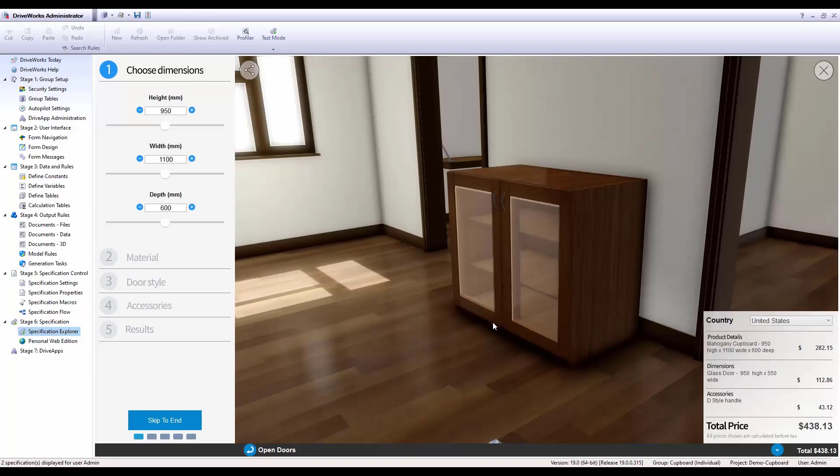So you'll see that we've got this interface where we can go in and specify the height, the width, the depth, kind of rotate our model around and get a nice perspective on what we're creating. And then we can proceed through a number of design choices such as material, the style of door that we're going to have, and then things like accessories, knobs, pull handles.

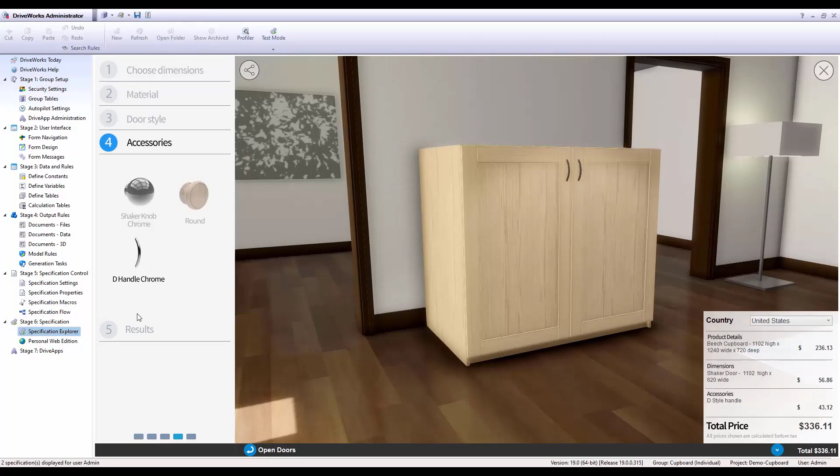And at the end, what we wind up with is essentially a deliverable for all of the information and documentation that we need. So I've got the ability here to have DriveWorks go in and quote this cabinet.

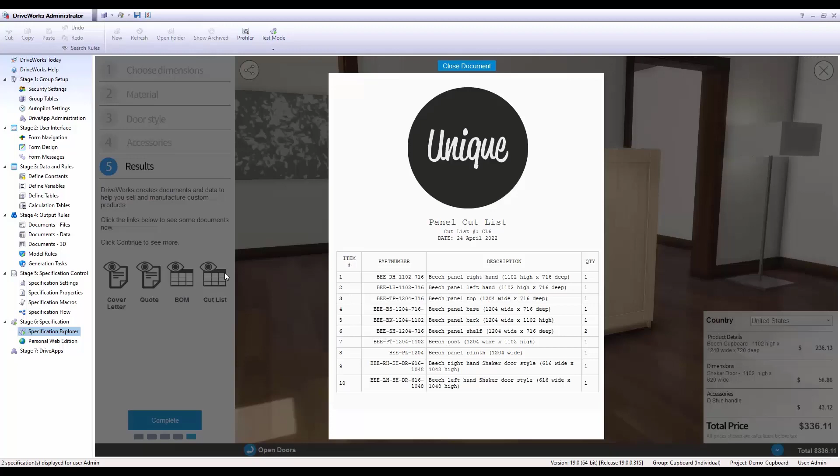It can take into account all of those parameters that I specified and then give me accurate pricing on the fly. It can also generate a bill of material that I can send out on the floor so we know what components we need to round up, as well as a cut list for all of the items that we're going to have to custom cut and manufacture.

Of course, the big thing that this would also deliver is all of the SolidWorks models. So if we had a little bit more time, I would basically hit generate and we could watch this thing kick out the 20 or so models that are required to actually build this cabinet.

But in a nutshell, that's what design automation is. It's the ability to take all of these processes that really aren't terribly difficult for our engineering team or our designers, right? The ability to go in and modify these models to create a custom configuration. But we're greatly reducing the amount of time that takes.

We can take a process that was hours or even days down to minutes. In this case, it didn't take us long at all to go and configure this cabinet, and we could generate all of those documents and models in just a number of minutes.

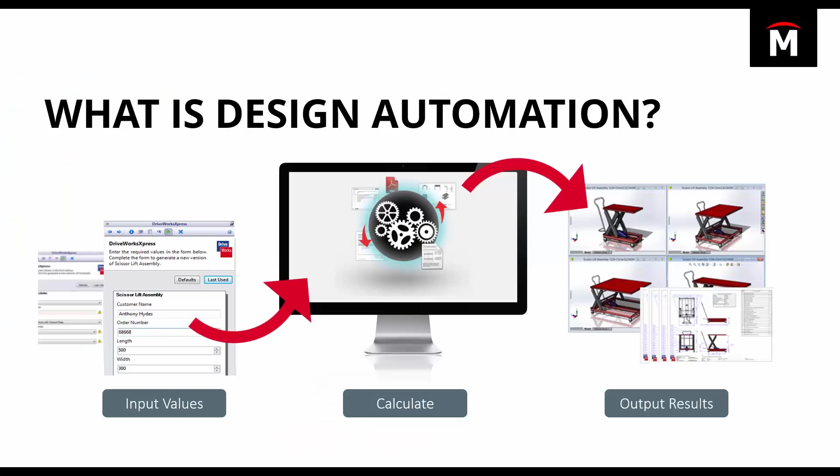So design automation can solve a lot of today's challenges, and the big question that often comes to mind is, if automation is so great, why wouldn't you automate? And the answer really isn't always that simple.

First and foremost, automation can be intimidating. Traditionally, we've talked about programming, having to know a programming language and develop your own applications in order to automate SolidWorks and some of your other processes.

There's always kind of the fear of change. Companies are afraid to part with the way it's always been done.

Sometimes companies are just unaware of what automation capabilities exist, right? You kind of get the blinders on, you're very focused on the task at hand, and you fail to just kind of stop and look around and see what possible solutions exist.

And then finally, automation can be intimidating. And if you don't believe me, jump in a self-driving car, and the first time you take your hands off the wheel and let the car automate that whole driving process, it can be a little bit scary, right? So there's a number of things that can be a little bit intimidating or that companies often face, and it's not uncommon.

So we've got a slightly different approach with DriveWorks that makes this a little bit different. So when we're approaching automation in the traditional sense, we're often thinking about programming and API. We're thinking about things like C# and Visual Basic and having to write and know all of these programming languages, which has a very steep learning curve. Okay? It also requires a lot of ongoing maintenance.

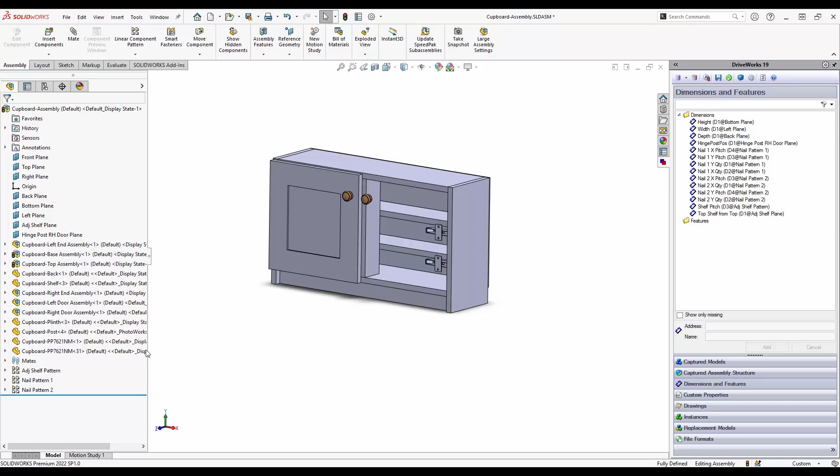As the height of this cupboard gets a little bit taller, we might need to add additional shelves. And so that's basically something that DriveWorks needs to be able to automate through rules. In order to make this happen, all I've got to do is go find whatever functionality in SOLIDWORKS controls the number of shelves and capture it. So I've actually got a pattern down here for the shelf.

And if I double click on that, you'll see right out in the graphics interface, it actually shows the spacing and instance count for that pattern. And if I click on the instance count, over on the right-hand side in DriveWorks, it allows me to just capture this value and give it a name. So I might go in here and just give it something simple like shelf quantity and hit add. And you'll just see that it adds that shelf quantity value to this list of already captured dimensions.

So you'll see that I've got some in here for height, right? We just selected the height dimension. We selected the width dimension, the depth dimension. And so I'm not really having to worry about any of the API or some of the very technical information that would kind of allow me to access this information in the background.

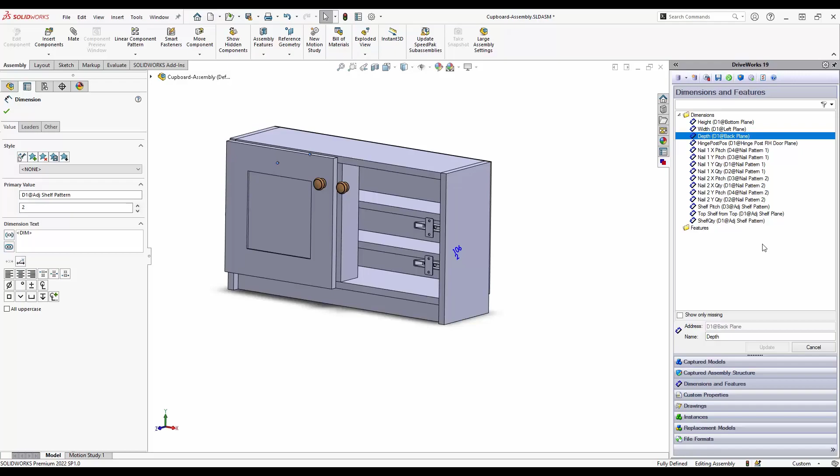I'm literally interacting with the SOLIDWORKS models that I'm familiar with, finding the parameters that we know we need to be able to change. I click on them, I give them a simple name, and I hit add, and that's essentially it. Okay, so in SOLIDWORKS, it's very easy to go in and pick out the different pieces that you want to automate. Now back on the DriveWorks side of things, what we're going to do is take those captured values and write rules that allow us to change those values.

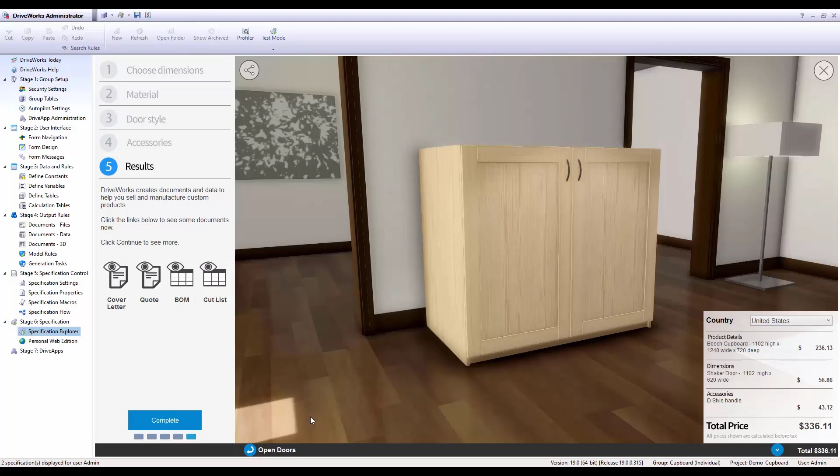So maybe the current height of the cupboard in my actual SOLIDWORKS model was something like 400 millimeters. I'm going to figure out a way to write a rule that allows me to vary that value with DriveWorks. Now, in order to do this, I really need some sort of input. And we saw that I had some sliders I could kind of work around with, and you'll actually see that on the back end of this DriveWorks project here.

It's very easy to create a graphical interface because you simply just grab these different form controls that you see up here on the toolbar and you place them onto your graphics area. So I just selected a couple sliders, placed them out here, and then I gave them names like slider height, slider width, slider depth. And this allows me to essentially input these custom values.

Once I have captured the items in my SOLIDWORKS model that I want to be able to control, and then I've given myself a way to vary those values, essentially inputs to specify new values, I've got to find a way to connect the two. How do I take the value from height and drive it into the dimension for height in my model? Well, that all comes down to the rules engine in DriveWorks.

So right here, inside of DriveWorks, I'm going to go to Model Rules, and you'll see a list of all the different models that I've captured in DriveWorks. If I click on one of these models, I get a list of all the different captured items associated with that. So right now I've got the top level assembly selected, and these are all the dimensions and custom properties or features that I've chosen to try and automate.

And what I'm going to do is I'm going to go double click on the height dimension. And this is going to bring up a rule that we're going to go ahead and fill out here. So if I want to go in and take the value from that slider and transfer it over to the dimension in my model, it's actually very, very simple. I don't have to worry about any of the crazy things associated with, let's say, a C# program. Things like namespace, methods, libraries, you name it.

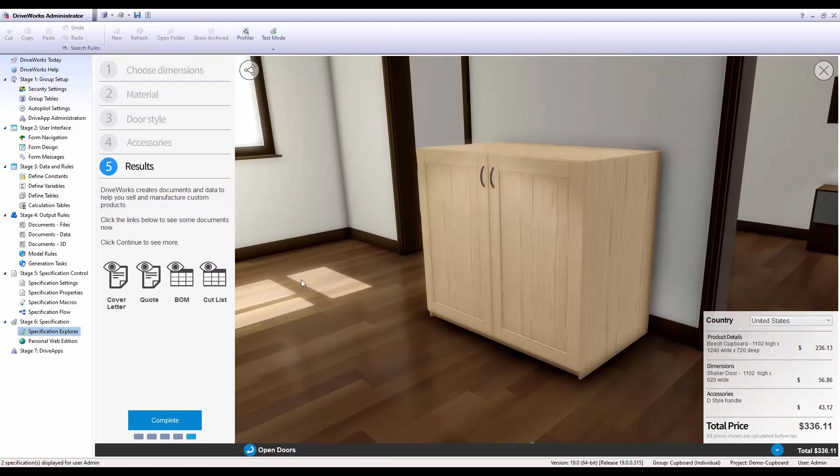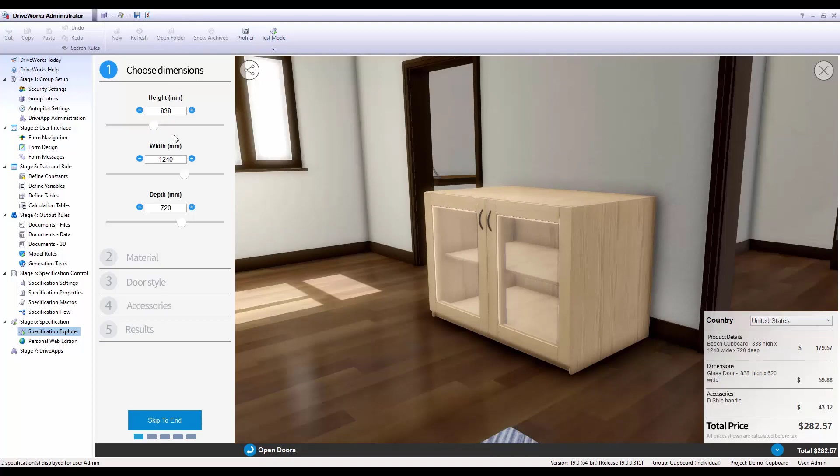that example that we were running earlier, and if I change this door style to glass, what we'll be able to see is that as I vary these height dimensions, notice that when it gets a little bit shorter, we go from 3 shelves down to 2. And it seems to happen as we cross that 900 millimeter threshold. Anything over 900, we get essentially 3 shelves, or kind of a bottom floor and then 2 shelves above it. And then we reduce our shelf count by 1 as we get below that 900 millimeter threshold. So how would we write a rule to accomplish that?

Well, inside of model rules, I'm going to go find that shelf quantity dimension that I selected earlier, and I'm going to write a rule to determine whether or not we need to have 1 shelf or 2 shelves. The way that you would do this is with an if statement. Now, you may have used if statements in other applications, even something like Microsoft Excel. But if you're not familiar with an if statement, DriveWorks actually makes it really easy to write out the correct syntax. If I go to this functions dropdown, you'll see that there is an if function that I can select. And this particular function actually has a handy little wizard that will help me create the proper syntax.

And what it's asking for first is the condition that I want to evaluate, right? What is the determining factor when we're trying to decide if we need 1 shelf or 2 shelves? Well, really, that's going to be the height of our cupboard. So I'm going to go and select that height slider again. And essentially I'm going to say that if we're over 900 millimeters, we need 2 shelves. And if we're under, we need 1 shelf. So I'm trying to decide if my slider for height is greater than 900, right?

Once I've determined what that condition is, now I've got to determine the outcome. What happens if it's over 900? What happens if it's under 900? So for my true condition, what I'm going to say is if it's over 900, give me 2 shelves. If it's under 900, give me 1, right? I'm just typing in the result, and once I'm done, I'll hit finish, and you'll see that it actually builds out that syntax for me.

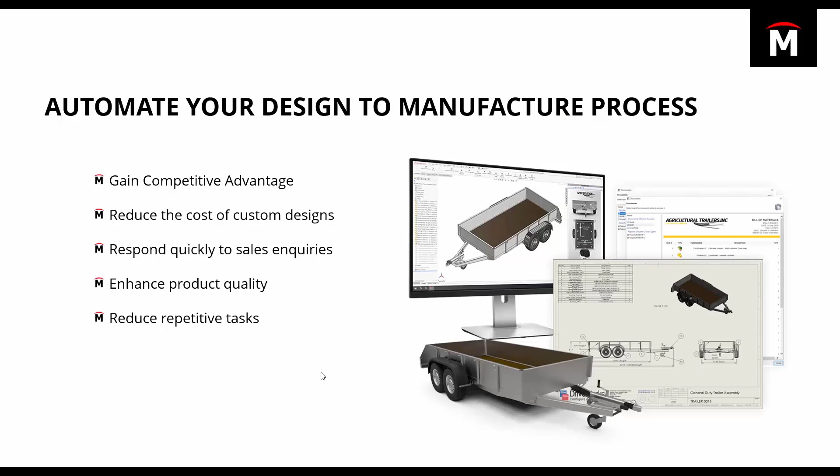So with that in mind, the next question is always, where do we even start? Automation, even when it's simplified, is still a somewhat complex process. There's a lot of variables to take into account, and it may not be something that you've ever explored before or tried to attempt. So I'd like to offer a couple of next steps to you guys. And the first one we talked about earlier, that's just go check out DriveWorks Live, explore some of the different possibilities, explore the rule builder, the form builder, workflows, integration, just some of those cool projects to get an idea of what DriveWorks can accomplish.

You can also try out DriveWorks Express. If you have SolidWorks, you actually already own DriveWorks Express. It's free. It's included in every single seat of SolidWorks. So you already own this tool. You can jump in it. You can try it out. You can contact me. I'd be happy to help walk you through an example in DriveWorks Express and maybe help you set up your own project.